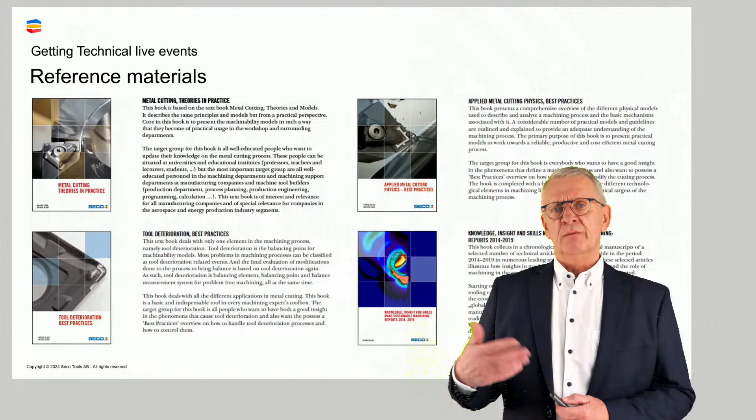Because model-based machining, there is a bit of a challenge here. Model-based machining means that we want to approach a machining process from a model which is a description of reality, that describes reality in such a way that we can understand it, that we can control it, that we can influence it. That's the target here.

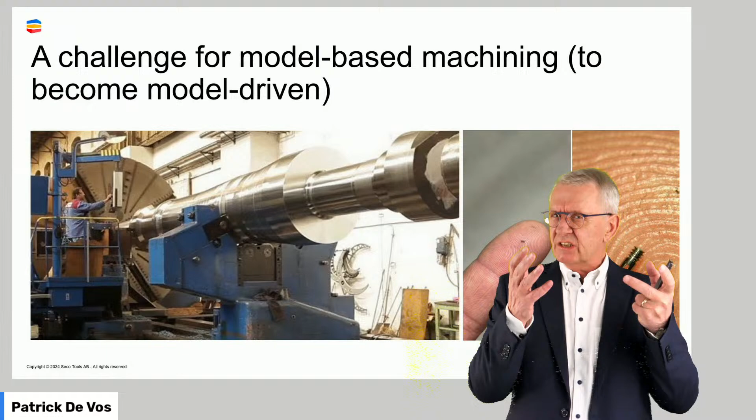And model-based machining, the challenge is: can we describe a model that could handle both these situations, and everything in between of course? That's the big challenge.

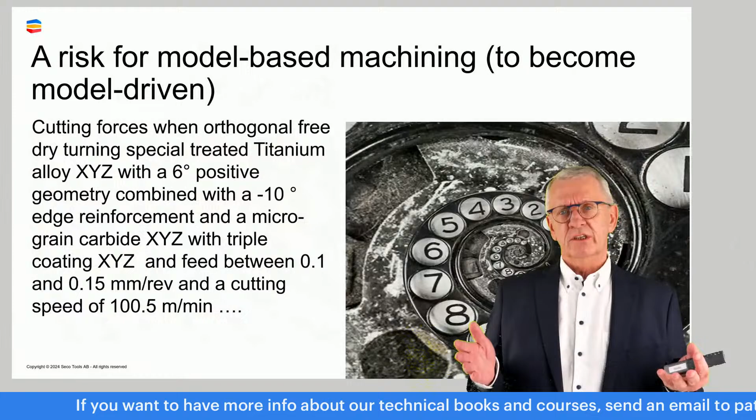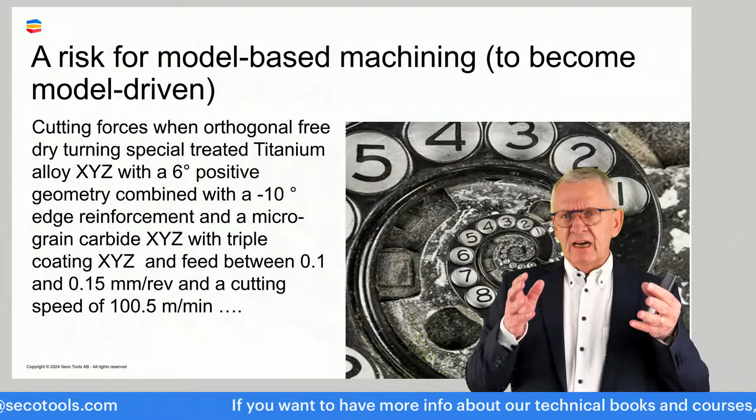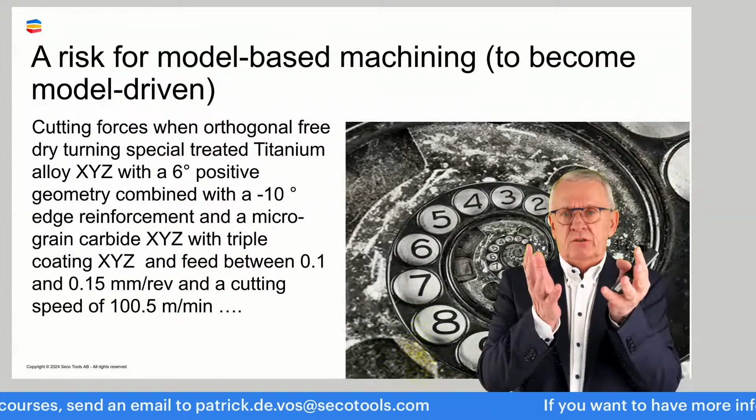And the risk today, because if you go out on the internet and try to find information on machining, what you find, and I think that's a risk, is that people dive further and further into a machining process. I just give an example here: what are the cutting forces with orthogonal free dry turning with specially treated titanium alloy, with a specific tool and specific cutting conditions? They do a lot of testing, and they come up with a certain thing. Then the question is, this description of reality, is this usable outside of the original setting?

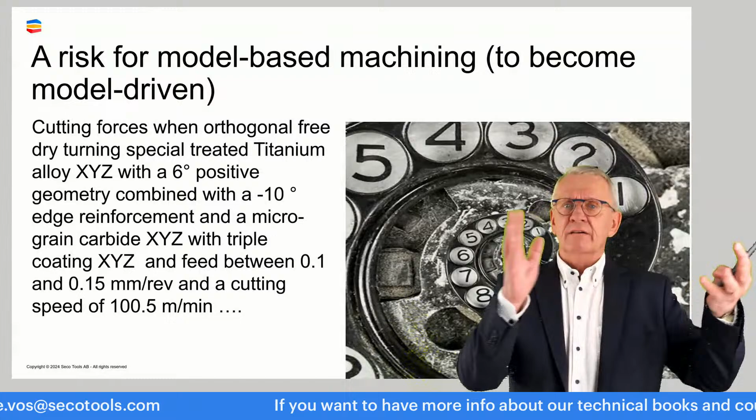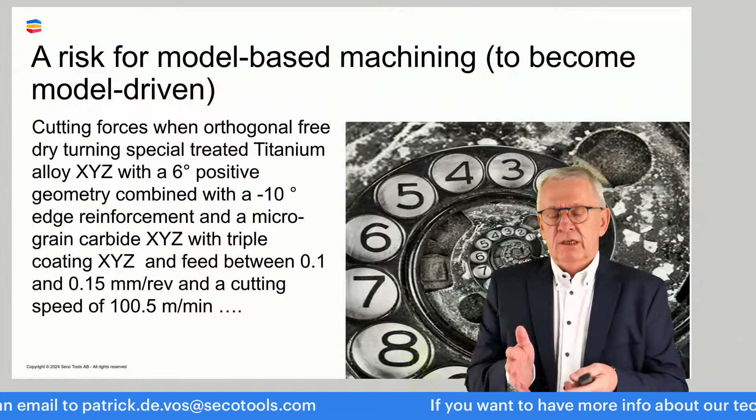That is a bit of the challenge: finding a model that describes whatever reality, and if it's possible, that's another question, but that's the challenge. The risk in trying to find that model is that we lose ourselves into details. And that's what we have to be careful with.

Now, what I want to do, and as I said, it's only 45 minutes, but I want to, because personally I find this very exciting: machining physics, applied physics, understanding the process. Because if you understand the process, and then suddenly you have a situation and you think, and you come up with what you think should work, do this, do that, and so on, and it works—I think that's exciting.

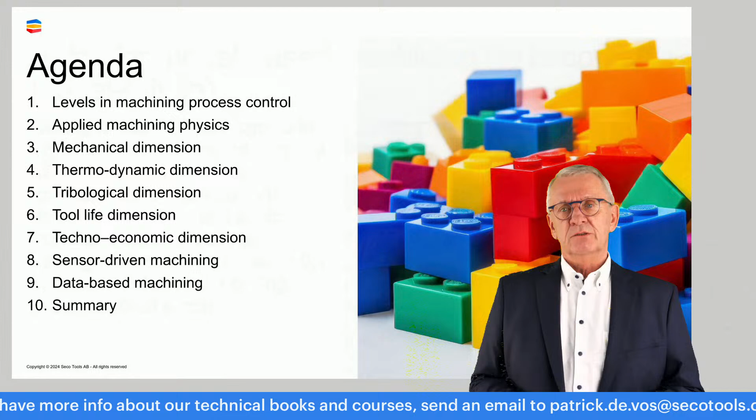And what I can try to do here is bring over that same excitement to you, that you want to learn more about these things. All the details we cannot handle, not in 45 minutes. Let that be clear from the start.

Now, if we talk about model-based machining, what is model-based machining? What's the big picture? How do we have to see things? Now, if you look to a machining process, we want to control it, we want to manage it, we want to make sure that it delivers what it's supposed to deliver, and that we have things under control.

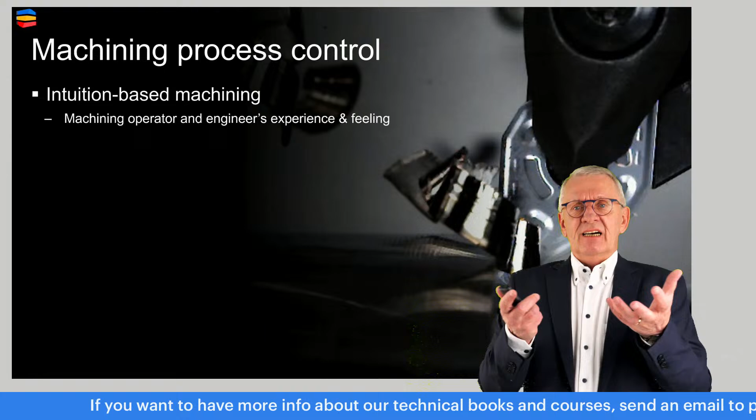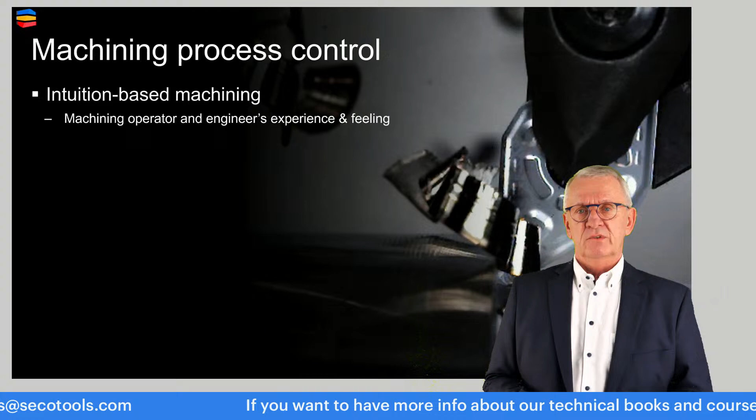Now, from a historical perspective, nearly since ever I could say, the traditional approach is intuition-based machining. Intuition-based machining is a situation where we have an operator, and the guy has experience, expertise, and he takes decisions based on intuition, on Fingerspitzengefühl, as we say in German. And that is intuition-based machining.

One level higher, the subject of today, is that we try to transform that intuition into more objective models, that we try to go away from the subjective approach—I think, I feel—and we go more into an objective approach. It's not about feeling, it's about knowing. And that is what we call model-based machining.

And if we continue this journey, because model-based machining, kind of since we started to use numerical controlled machines, that model-based machining appeared more and more into the picture also.

But if you look at the situation today, we see that people are moving towards sensor-driven machining. Sensor-driven machining is that I measure things, if possible, in process. During the actual process, I measure the situation, and we'll describe in a couple of minutes what I mean with the situation, but we measure.

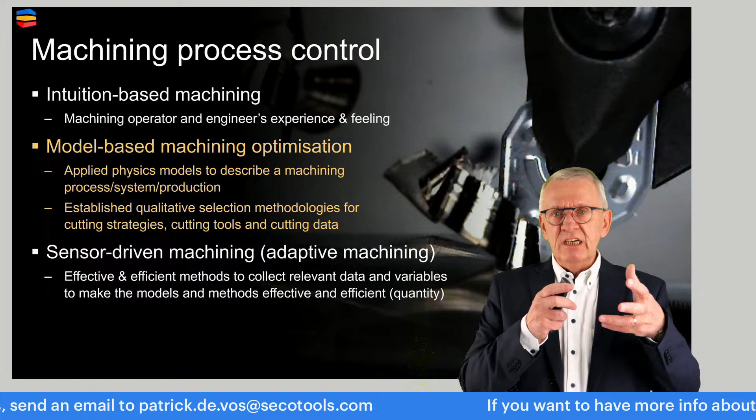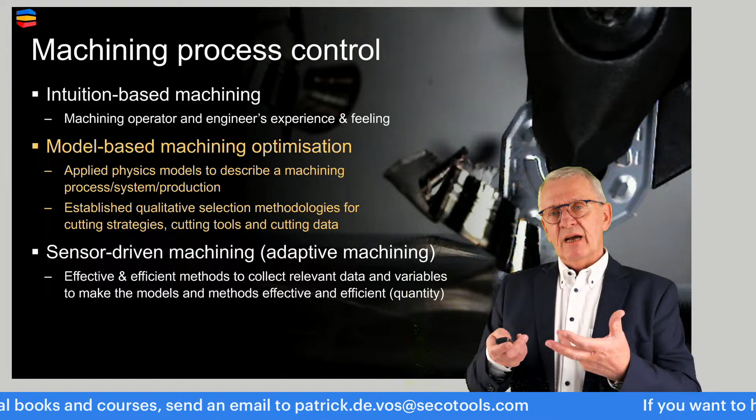We compare what we measure with the model which we described previously. We see if there are deviations, yes or no, and if deviations are there and we think the deviations are unacceptable, we modify. Some people call sensor-driven machining also adaptive machining, in the sense of: I measure, and based on the results of my measurements, I modify my machining process.

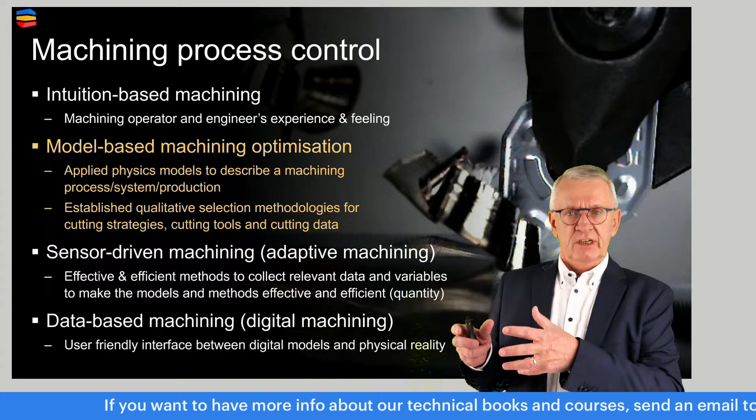Ultimately, it ends into, and I think this is really the future, but I also think the future already started today, data-based machining. People call it digital machining. I have a model, I have a lot of measurements from my sensor-driven situations, I bring the two together and I create a digital twin of a process, and I use that as a starting point to control the actual physical machining process. That's digital machining in its simplest form defined, data-based machining.

Now, intuition-based machining, as I said, that's the origin. It all started there. We were doing machining, and machining is a process we've done now for around 150 years, in modern times at least. People didn't really understand from a physical perspective what was going on, it was trial and error, and people got a feeling of what is possible and not possible. That's very typical for intuition-based machining.

All decisions about how to do it, which tool to use, cutting conditions, improving a situation, are based on experience, on the expertise of operators. Typical here are trial and error situations. I'm pretty sure you all know it: if you have a new tool and you want to figure out if it will work in a situation, what do you do? You take a test tool and do trial and error. Is it working? Is it not working? What do I modify to make it work? And so on. That's intuition-based machining, historical, where we come from.

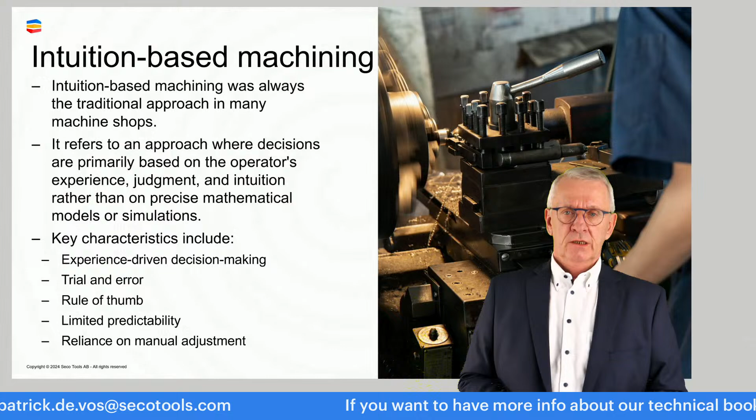Today, we try to work more and more, and as I already said, this came a bit with numerically controlled machines, where we said these machines, it's a bit unacceptable because they're rather expensive machines if you look at the hourly rate. We cannot stand there and try, and suppose, and think, and hope, that type of thing.

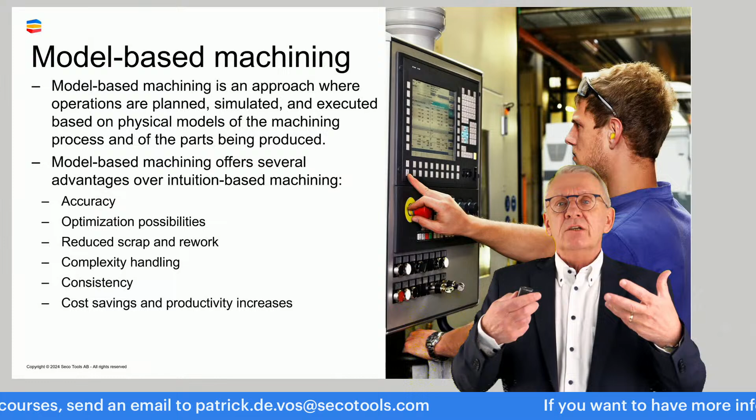We need models. We need models to describe. And this became even more important in the last 10, 15 years, as we saw that the batches of workpieces we had to produce became smaller and smaller and smaller. There was no time anymore for the traditional operator to figure things out. We needed to know as fast as possible what to do, and be rather sure it works.

Now, model-based machining. Machining is a physical process, so if we have a model, the model should describe the physics of machining. The model should, and I give it a title, Applied Machining Physics, use physical principles, we apply physical principles and try to describe a machining process.

Now, a machining process, most of you know it by heart I suppose, is a process where I have a cutting tool, and I bring the cutting tool in contact with workpiece material, with a set of cutting data, cutting speeds and feeds and that type of thing. I move the tool into the workpiece, I deform the workpiece material, I deform it until it shears off under the form of a chip. That is the description. There is even a DIN and an ISO norm that describes this. This is machining in its purest form.

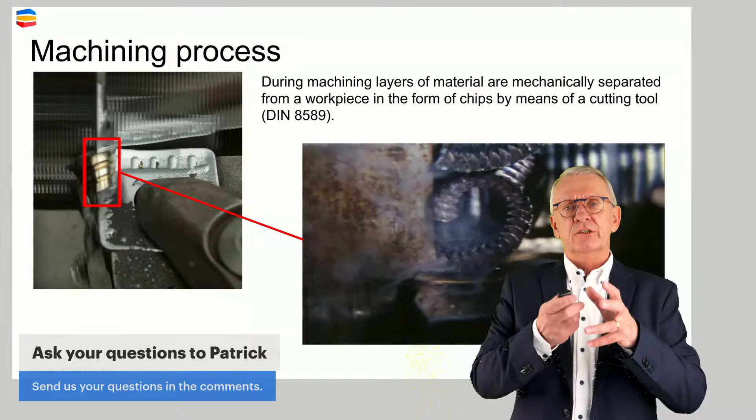Now, how the movement of workpiece and tool are relative to each other, that's the typical type of applications we have: turning, milling, and drilling. But all of them have in common that there is a cutting edge in contact with workpiece material, deforming it, shearing it off under the form of a chip, and as such transforming a rough workpiece into a finished, or semi-finished, workpiece. Now if you look at this process, and on previous occasions we've been talking about this, so here it's just repeating, if you look at a machining process, it's obvious that there are different types of phenomena.

I'm going to deform a material. To deform a material, I need to push against the material, so there is a mechanical aspect in this whole thing.

Chips are being formed, and those chips need to be taken care of. So that's another mechanical dimension. As I'm deforming material, heat is generated, and that heat has consequences, increased temperatures. That's the thermal effect around the machining process.

I'm going to create a certain surface - that's the quality aspect. I have a chip which is in contact with a tool, and there is a gliding process under pressure and so on, so there's going to be some tribological phenomena taking place. There is quite a multitude of dimensions we need to take into consideration if we want to describe a machining process.

And if we think now on describing a machining process, what exactly do we want to describe? Well, we want, in the end, a result which is a correctly finished workpiece at a certain cost, produced within a certain time. That's the wanted result.

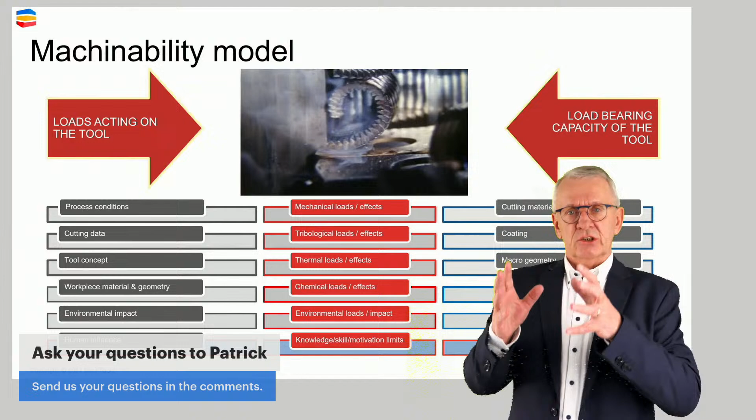And to achieve that result, we need to have a process where all the elements are in balance. I have a machine tool, I have a tool, I have a workpiece, I have fixturing equipment. All of that needs to be brought together in a balanced form so that everything is under control. And in the end, the result of the operation is a correctly finished workpiece, quality, at a certain cost, within a certain time.

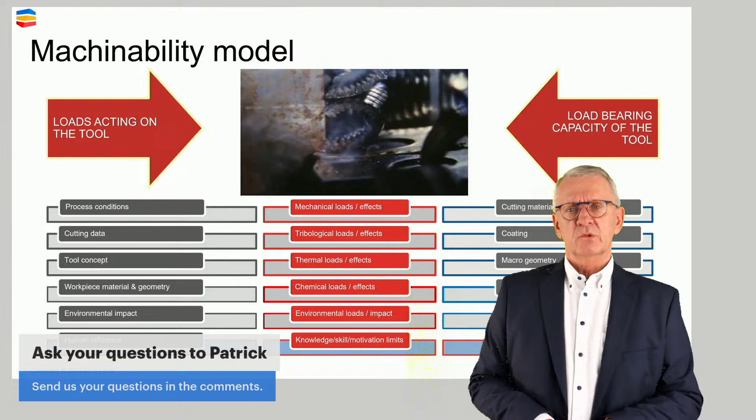And that is the model how we work with machining. Some people call it a machinability model, but that's perhaps a bit discussion with words. It's a model where I say, okay, I have a process and I have a cutting tool. I have a workpiece and a cutting tool. I bring the two together and there needs to be balance.

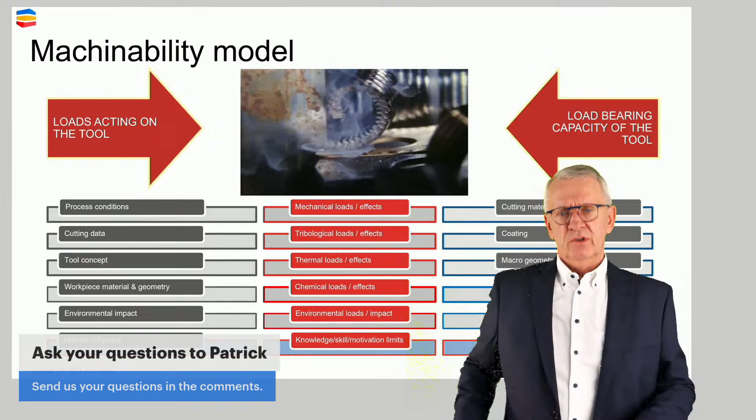Balance in all respects, and that's what I try to show here with the middle thing. There must be mechanical balance, thermal balance, tribological balance. Everything, all these phenomena need to be well balanced.

And there are variables influencing those phenomena. Some of the variables come from the process, here in this picture from the left, and those are going to put a load on the cutting tool - a mechanical load, a thermal load, whatever. And the cutting tool, the right side here in the picture, has a certain ability to carry that load.

And that's the balance I need. The carry capacity of the tool and the loads acting on the tool need to be in balance. Because if the loads acting on the tool are bigger than the load bearing capacity of a tool, I have unbalance, I have technical unbalance.

The result will be a badly functioning tool. The result will be a broken tool. And if you have a broken tool, you have a destroyed workpiece, or in quality, or in costs, or in time. So there's unbalance.

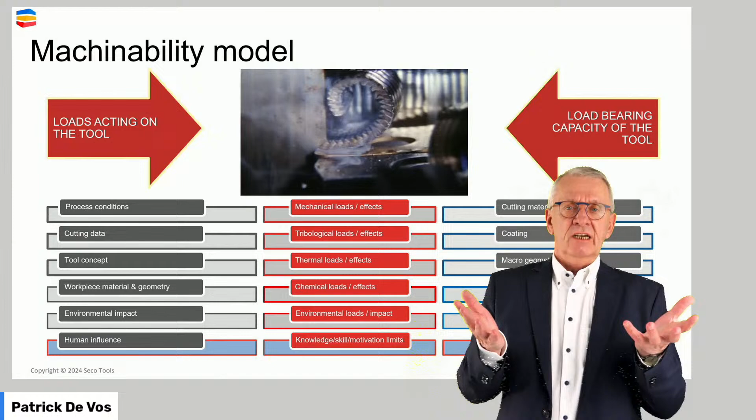There can also be a different kind of unbalance, because some people think, wait a second, I'm going to do the smart thing. I take a tool with a very big load-bearing capacity, so I'm safe. And it's a fine approach. However, we have to realize that mostly a tool like that is, from a purchasing cost perspective, more expensive.

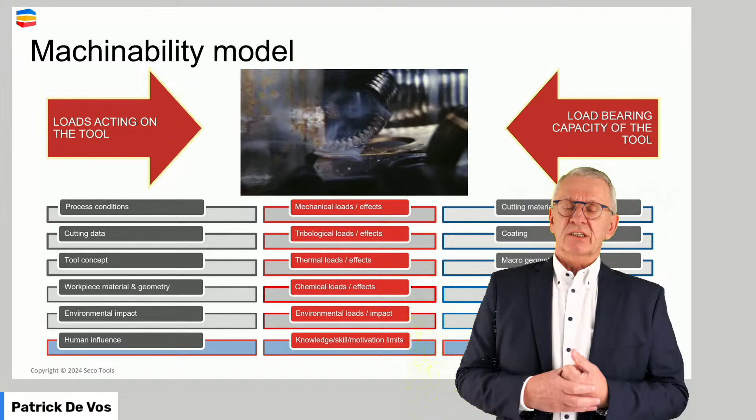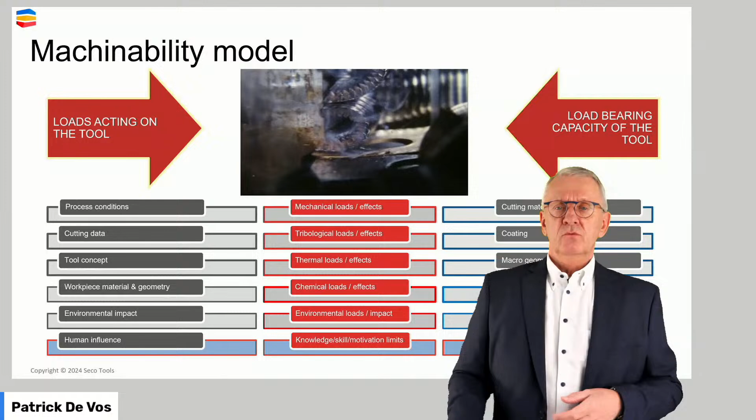And then the question can be asked if we don't have an economical unbalance, that we are using a tool which is too good, between brackets expensive, for the operation we want to have. So it's all about this model.

And the situation is today still, if I work with this model, if I try to figure out which tool to use, cutting conditions, machining strategy, to have a balanced situation, and people ask after a while, okay, did I do a good job? Did I manage to create a well-balanced situation? We kind of fall back on intuition-based thinking.

We ask the operator. How was it? How was the operation? How were the chips? Didn't you have vibration? That type of stuff. Or a little bit more objective, because asking the operator is a subjective approach.

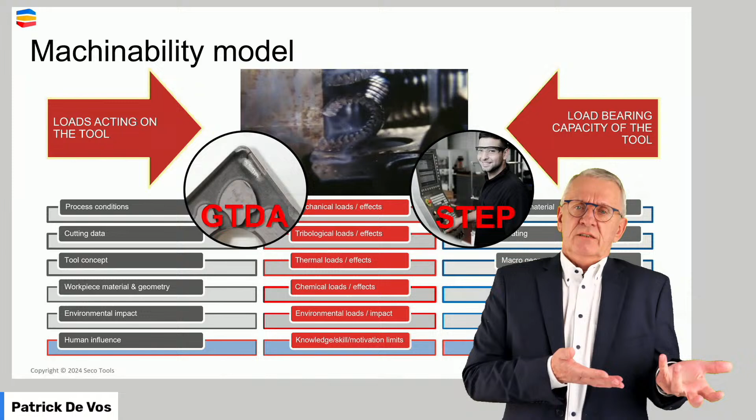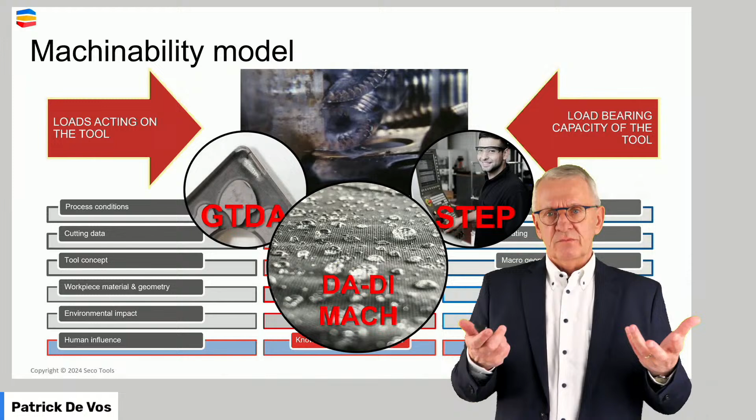A little bit more objective is looking at the used cutting tools, because if you know what to look for, a used cutting tool, a used cutting edge, once shows things. So the evaluation of did I do a good job working with this model is objective, subjective - ask the operator, look at used cutting tools - where hopefully a future, not so far away, will be that I can do data driven machining, that I have in-process measuring of things to see if things are indeed well balanced.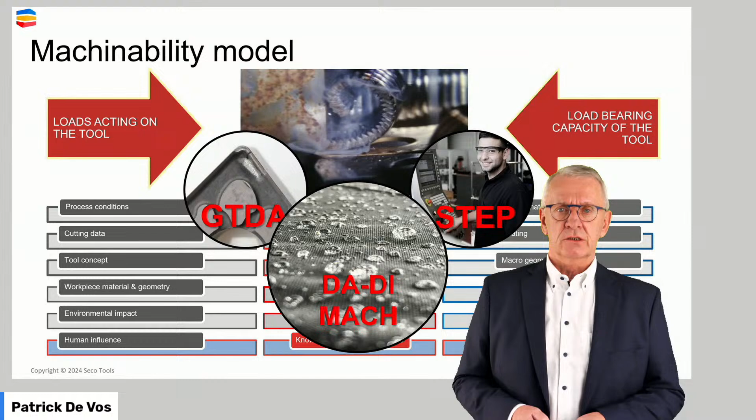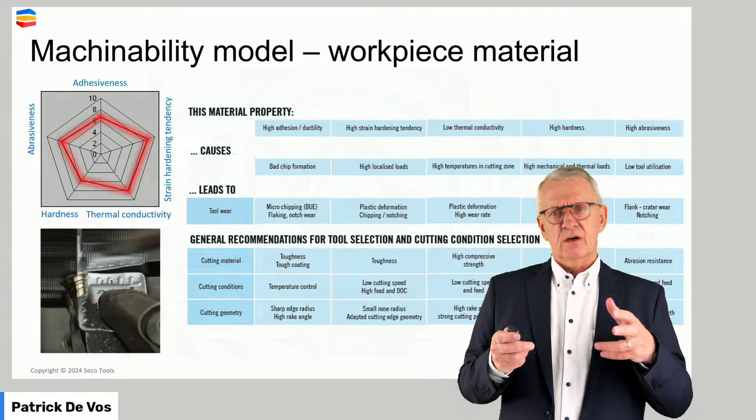Workpiece materials play a very important role in this. Quite a lot of work has been done to find out what are the real properties of a workpiece material, or the properties from a workpiece material that have an impact on how a cutting process goes on.

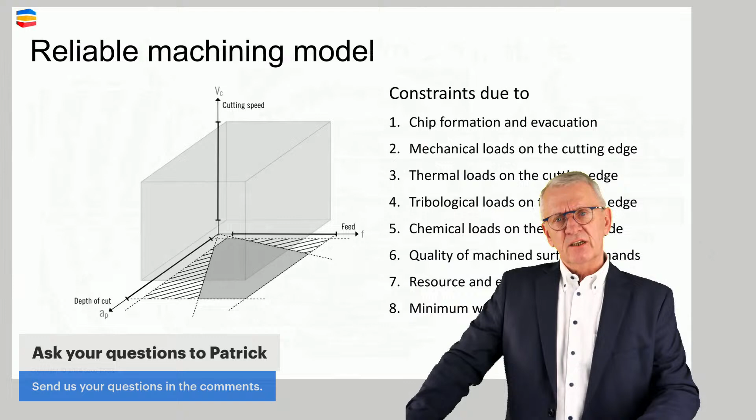And if you have your machining model and you understand what it is, and if you have your insight in your workpiece material properties, you can bring the two together and you can start thinking: okay, I want to have mechanical balance, I want to have tribological balance, I want to have thermal balance, which means that I don't want to overload the tool.

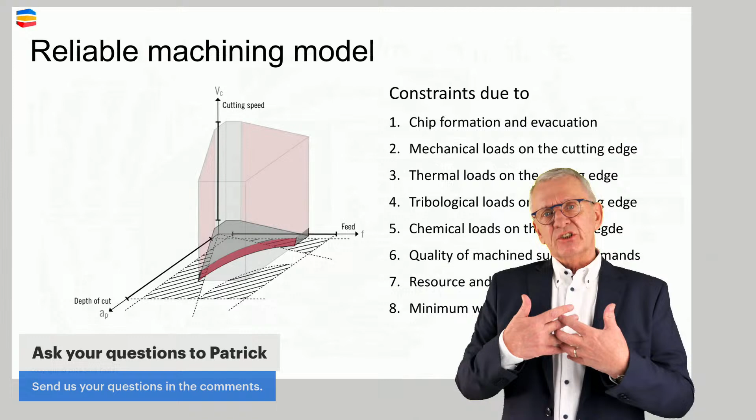And that can be translated into constraints. And constraints sounds negative, but it's not negative. It's just a line, a border that you should respect, not to overload the cutting tool, to have a safe operation, a reliable operation. And if you think on it, reliability is key, because I want a correctly finished workpiece at a certain cost in a certain time.

To make it happen, that total picture, I need to have a reliable process. And that is one other way to define a machinability model. It is a model that helps me to find out where the constraints are. And once again, constraints is not negative. Constraints is, I don't know another word, borderline or whatever, that you have to respect during machining. And if you stay within the constraints, the process will work fine.

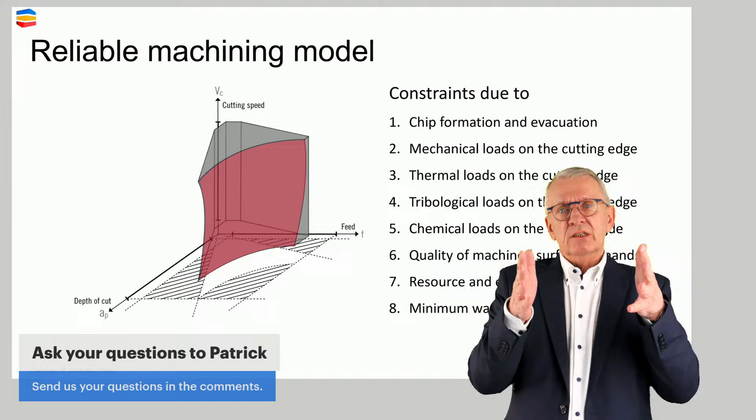And we have what we want in a very objective way. And it's not about I think, I hope, I suppose, but it's about I know. And that is the whole target of the exercise.

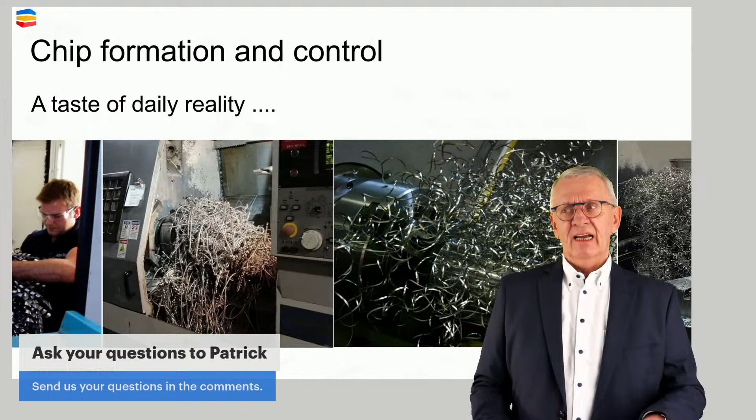Now, in this creation of a model, in this creation of a domain in which you can work and have a reliable process, there are mechanical things to consider. One of the things to consider is chip formation. And chip formation is perhaps, that's still a frontier in my eyes, because if you look at chips in reality, in a workshop, every single chip is different. And I think that's really a challenge. I still think we don't fully understand how a chip is formed.

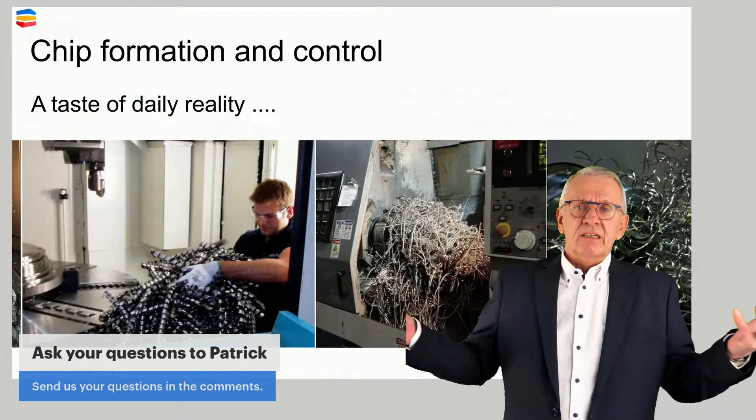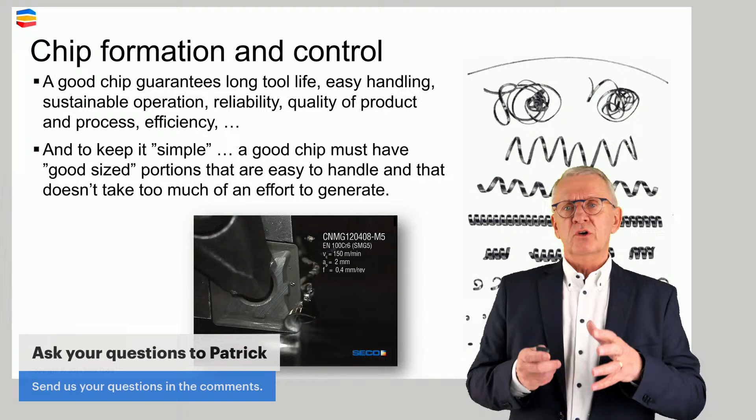Otherwise, we should be capable, much more than in the present situation, to control our chips and to avoid problems, as you see behind me, that are daily life in a workshop. Chip formation is about having chips of a good form, of a correct form, so they don't disturb the process. They allow the cutting tool to work. They are not putting in danger the quality of the workpiece, the safety of the operator. That is the definition of a good chip.

And good chips heavily depend on the workpiece material. I think you all know that. Workpiece materials, some of them give short chips, whatever. Others give long chips, whatever. And it's also depending a lot on which tool you use. Especially the geometry of the tool plays a very important role, and cutting conditions. And that's the battle here: better understanding than we do today, so we can bring more uniformity into the type of chips we form. We can take out a bit of the chaos factor from chip formation.

Mechanical is also cutting forces. I think a lot of you are rather familiar with what we refer to as the Kienzle modeling. There are quite a lot of models we use to describe cutting forces, the forces that we have to put on a tool so the tool can move through workpiece material, deform it, shear it off.

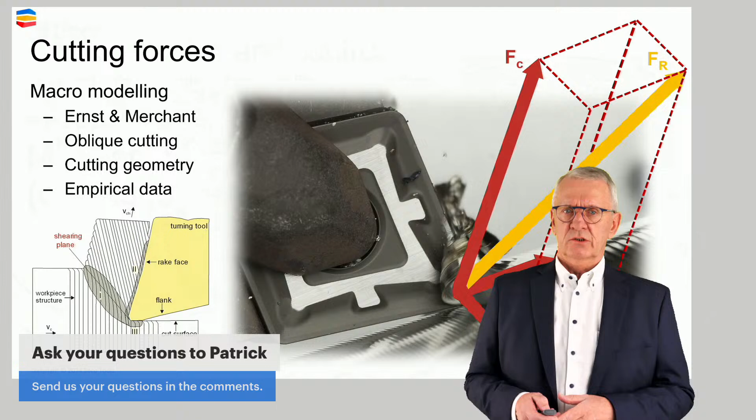Kienzle, still today, it's 50 years old, or it's 70 years old, but it still gives rather good results. So it's a rather good thing, and we need this because the cutting forces, some of the practical issues we have during machining, problems with quality, with vibrations, with broken tools, and so on, can be brought back to there being unbalance in cutting forces. We need to do something.

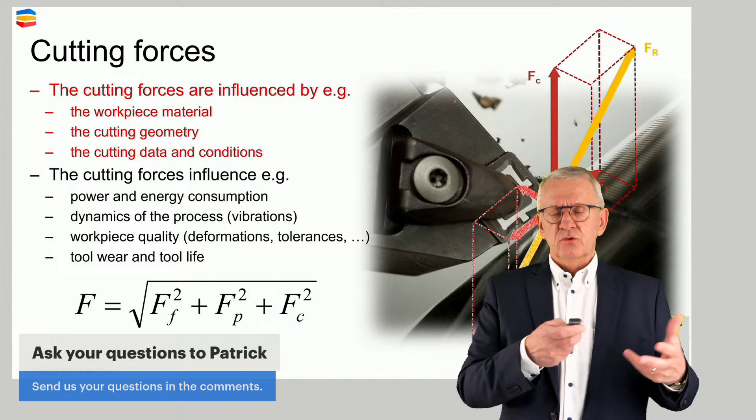And what the Kienzle approach then describes is the variables we have to work with to change cutting forces, to influence their size, to influence the direction in which they work. And there is even, and I don't want to frighten you away with this formula, because the reality of today is that we don't work with these things anymore. We have much better aids at our disposal for this.

But I want to show you the formula, because in this formula the first symbol there, psi v, that's what is referred to as the variation factor. And the rest of this formula, and a formula is just a symbolic writing of an insight, the rest of this thing we fully understand.

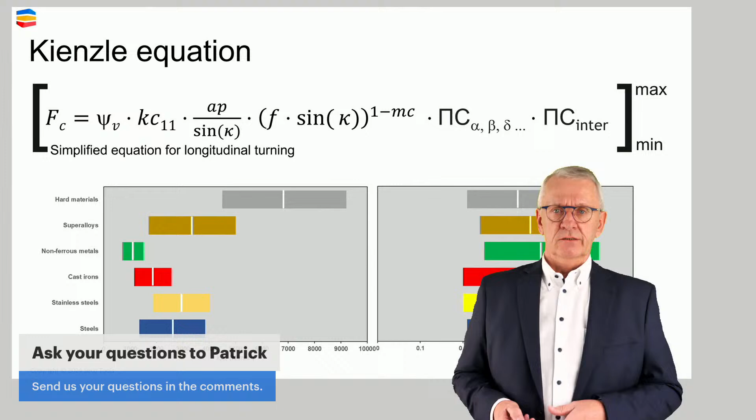We understand the relation between cutting conditions and forces, and between geometry and so on. But if we measure, we still see differences. So far, scientists put these differences into one single factor, psi v, the variation factor. Quite a lot of research today is done on that variation factor. If a model predicts something and we see in reality that there are differences, the big question is: in that variation factor, what is the variable creating the difference? That is what people work quite a lot with.

You remember perhaps one of the Getting Technical live events, we talked a little bit about this: there is not one single cutting force, but a variation of cutting forces, because of chip segmentation that causes cutting forces to go up and down. That's a very typical example of something which falls into that variation element in the Kienzle model.

Thermodynamics. We deform material. If we deform materials, heat is generated, and that heat translates into higher temperatures in the tool, in the workpiece, in the chip, and there are consequences to that. If we try to model it, partly we deform material and partly there is friction between the chip and the rake face, and between the workpiece and the clearance face. Mainly the shear zone is generating a lot of heat; to a lesser extent, it's also the friction.

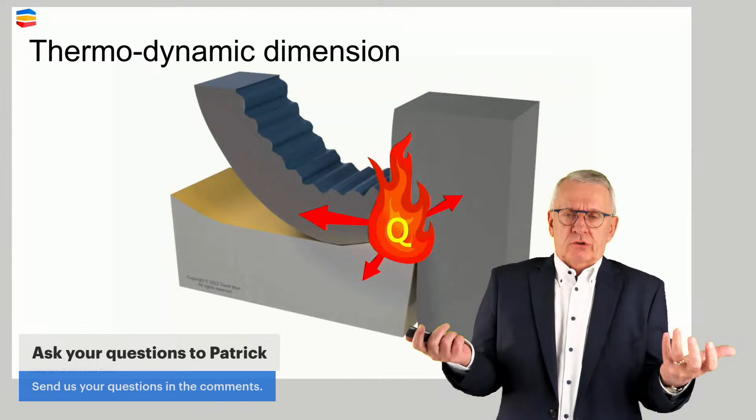Heat is being produced, and heat has a natural tendency to spread out. Part of the heat goes to the workpiece, part goes to the chip, part goes into the cutting tool. Heat that goes to the chip is very good for us, because it means the heat leaves the process without doing any harm. Heat that goes into the workpiece can modify the workpiece properties, deform it, cause expansion, change the structure, so we have to be careful with that part.

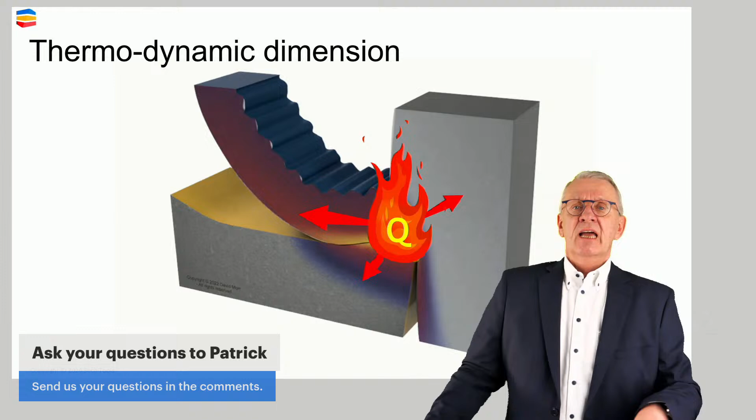Heat that goes into the cutting tool has consequences. Everybody talks about the cutting temperature, but there is no single cutting temperature — there is a cutting temperature gradient. There are different temperatures depending on where and when you look: after 1 second of cutting, after 5 seconds, after 5 minutes, or after 50 minutes. Each time you'll see a different picture of temperatures in the cutting tool, the workpiece and the chip, though the chip is of lesser concern for us.

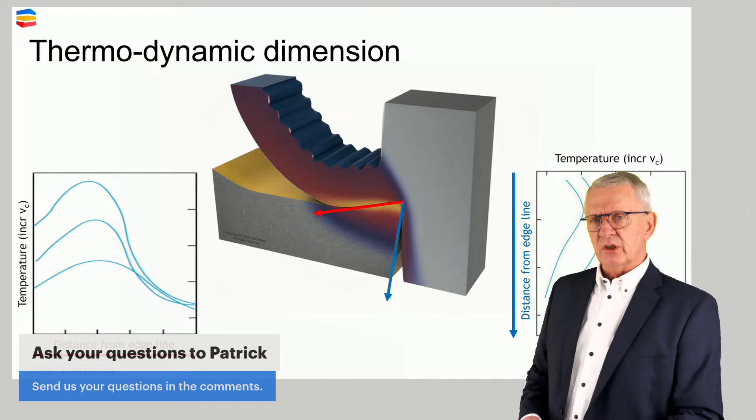It's intriguing, because if you look at the rake face, you see different types of temperatures, as shown in the diagram. At the cutting edge itself there is a certain temperature; as you move away from the edge, the temperature increases, and if you continue moving away, it reduces again. We see the same on the clearance face: not one temperature, but a gradient — at the cutting edge, then increasing as you move away, then reducing further out. You see 3 lines here, for 3 different cutting speeds, so whatever the cutting speed, this pattern reproduces.

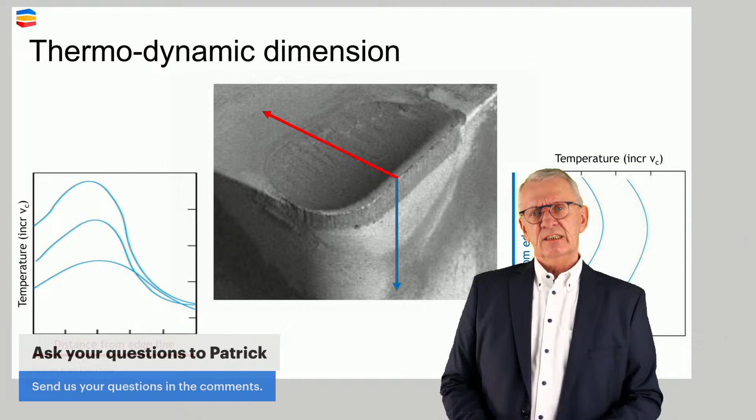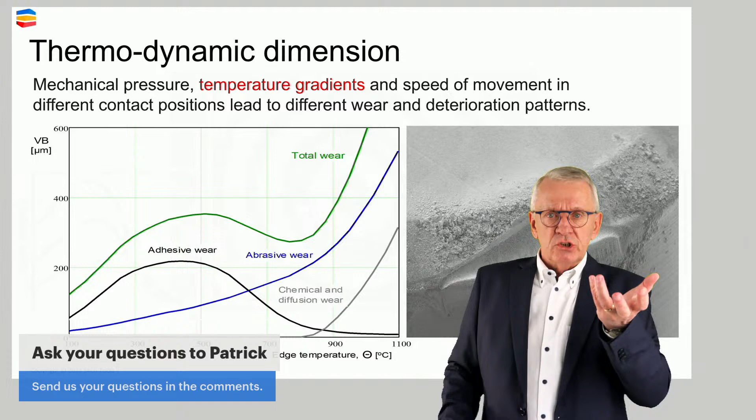Interesting is, if you look at a worn cutting edge, where the temperature is highest, you have the most wear after a given amount of time. So there is in machining a very clear relation between temperature and wear. Personally, I find this one of the most exciting pictures in machining: depending on a certain temperature — and remember we have different temperatures along a cutting edge, on a rake face and clearance face — which physical phenomena will be the main source for wear appearing on the surfaces. That brings me to the tribological dimension.

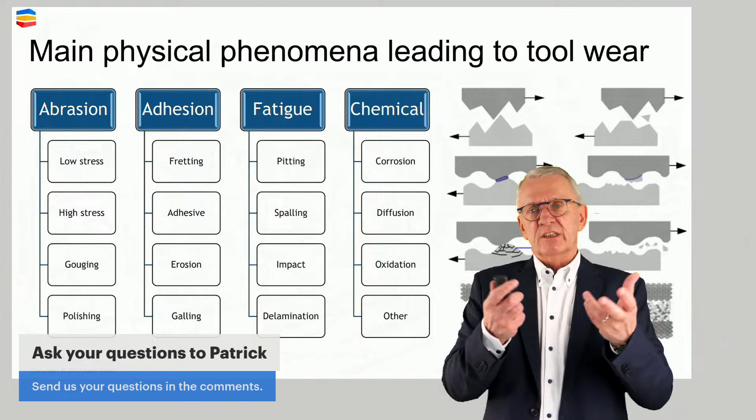There are mainly 4 physical phenomena leading to wear on a cutting edge: abrasion, the scratching effect; adhesion, the build-up edge thing, which I'm pretty sure you are familiar with; fatigue, the hammering effect on cutting edges; and chemical — we bring together different materials in rather high temperature zones with high pressures, so chemical reactions will also take place. So there are different phenomena.

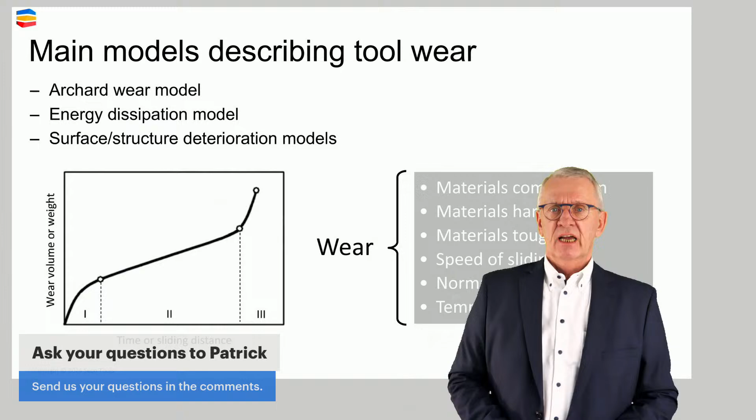How the wear develops, the pace of the wear development, is another variable. And if I bring the two together, which type of physical phenomena leads to wear and how fast does it lead to wear, I end up in what we call the tribological models in machining, describing how wear will develop on a cutting edge over time in a given situation. There are quite a lot of variables to take into account here.

If you look again to reality, and if you take, most probably you in your workshop, you also collect already used tools for reconditioning. But if you look in those bins with the used tools, and if you look at cutting edges, you see that roughly every cutting edge looks different.

So to apply this modeling, we need structured approaches. One structured approach is what we call global tool deterioration management. It's the subject for the next two sessions we are going to organize. Because if you control this, everybody, or a lot of people, think that wear in machining is a technical thing, and it is. But wear in machining, when well worked with, can also be a management tool, to influence what people refer to as operational excellence.

But I'm not going to talk too much here because time is flying already, I see. The next session and the session after, we are going to focus only on one single thing: global tool deterioration management. How to work with wear on tools in a way that it can become a management tool to take certain decisions to improve the operational excellence of a workshop.

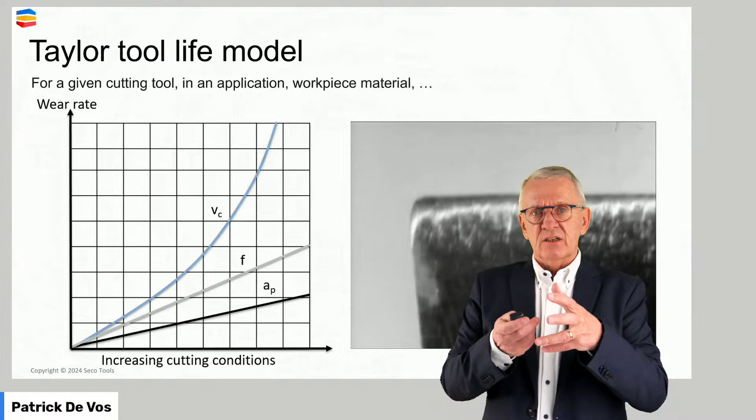Can I influence this? Can I control it? What are the variables? That is what we know today as Taylor's law, or Taylor's model, to describe tool life. Tool life is defined as the useful lifetime of a cutting tool, the time the tool can work and deliver on expectations. That's tool life. What Taylor noticed was that, mainly in a cutting situation of a tool and a workpiece, the cutting speed is a very important variable.

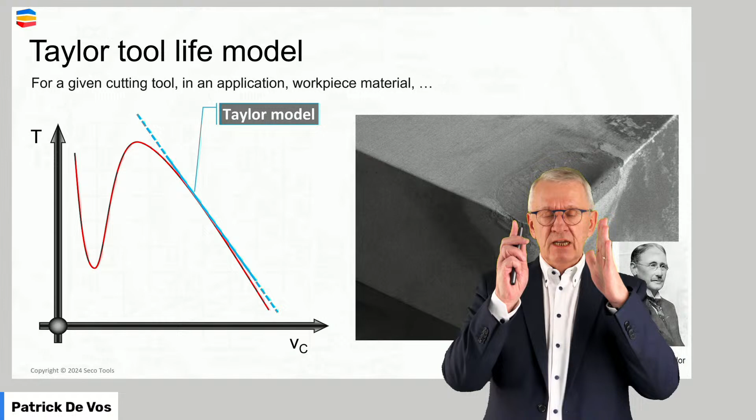So he focused quite a lot on cutting speeds, and he focused on a situation where he could control it. And that thing, you have to be aware, if you see the picture here, that Taylor's model works within a certain window. If you are out of the window, this model is not working anymore.

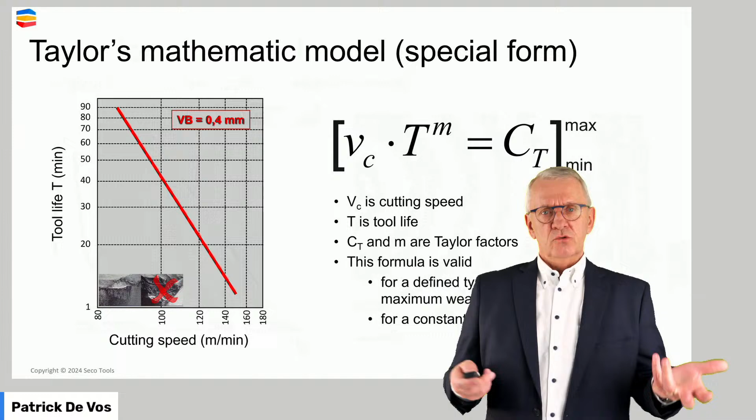We need other approaches. But this is, I think, if you call yourself a machinist and you don't know about the picture here, the formula is less important. Taylor says there is a relation between cutting speed and tool life for a certain type of wear.

Afterwards, people, of course, dove much deeper into this, and they figured out it's not only cutting speed, it's also the tool cutting material, the cutting geometry, the feed, and the depth of cut. So Taylor's original thing was extended to a much bigger thing. Again, here's the formula - I show the formula, not for the formula itself. We don't work with that anymore. We have much better things to work with today.

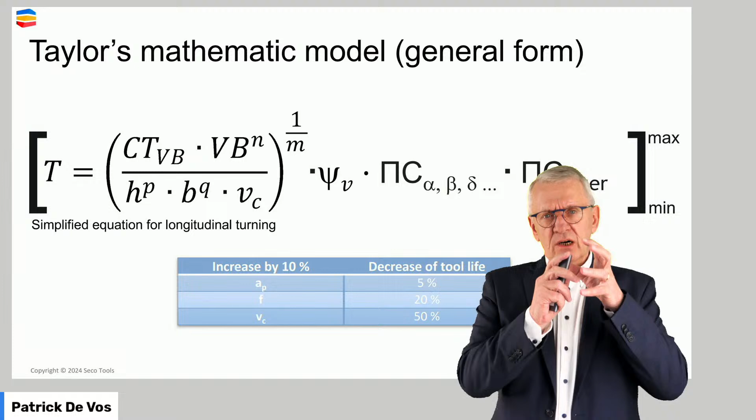But also here you see, after rather big discussions, the scientists said this Taylor thing, we can continue to work with it, but we have to add that variation factor. Here you see it in the middle, the psi v. Because we have a model, we work with it, we predict the tool life, we look to reality, we see reality is different. And then the question is: okay, what did we overlook? What variable is causing this? All of the potential ones are put into that one single psi factor, the variation factor, where quite a lot of research work nowadays is focused on how we can give it a value in certain situations.

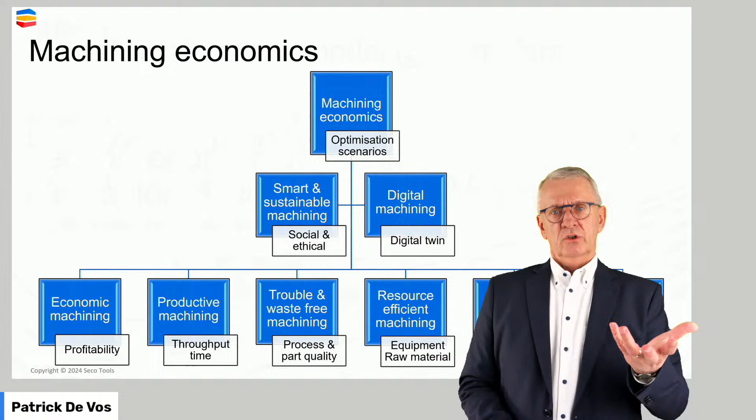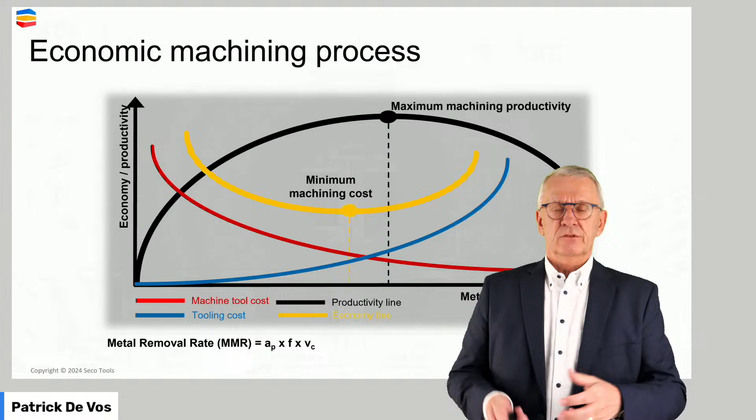You have also the techno-economical model. I added this just to be complete, because if you look at machining, next to the technical side, of course, there is an economical side. We do machining to produce workpieces with certain demands on quality and on costs. We want to work with minimum costs, so we have economical sustainability. We are competitive on the market with the products we produce.

What people have to realize, I call it the next step in economic machining, is that the costs in machining are not only related to the process, but are also related to the things around the process. If the result of your operation is a not correctly finished workpiece, you need to produce another one. That's an extra cost.

If your machine is standing still, not making any workpiece, for certain reasons, there is a cost related. These two extra costs, due to lack of quality and due to time efficiency, also need to be carried with the one workpiece you produce in the end. In other words, what I try to do here is link machining to process efficiency.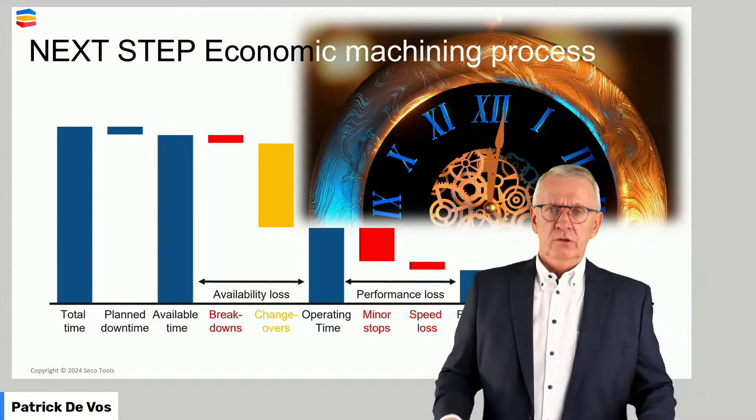Just to give you an example, you see here two situations in one. One situation is in the middle, a real situation, something I had myself a couple of years ago when I was working in a workshop. In the middle, you have a situation where 15% of the time the machine is actually producing workpieces. The other situation, around it, is where the machine is producing workpieces 50% of the time. Now, if we talk about optimizing, these are two very distinguished, different situations.

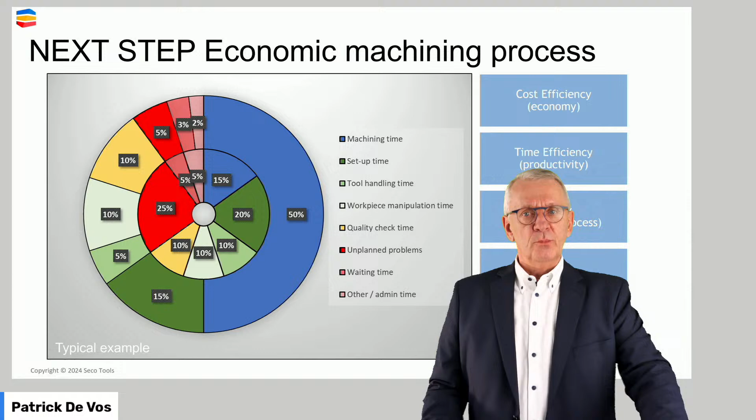Optimizing the total picture for the situation in the middle means first focusing on the things around the machining process, because they stand for 85% of the time. For the situation on the outside of the circle, machining stands for 50% of the time spending, so it's worthwhile spending time on optimizing the machining process because it's already a big part of the total time.

Model-based machining, very short. But as I said, we have the reference material.

A few words on sensor-driven machining. Because I think from a historical perspective, already Taylor, if you look to the book he published, where he described what we still call today the Taylor equation or the Taylor model, 1906, he already said...

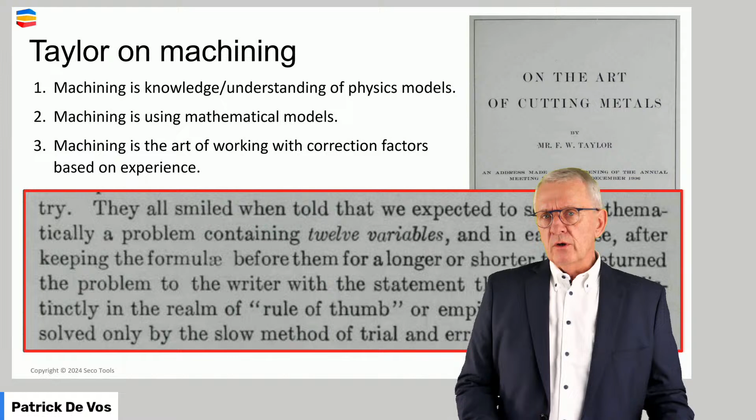I most probably suppose you can't read it, so I make it a bit bigger. Taylor said, okay, I have the mathematics, I have the formula, but if I take the formula, give it to mathematicians, they come back and say you have an impossible formula, there are much too many variables, we can't solve it. That's why for a long time, with intuition-based machining, we knew the model, but we had to count on the intuition of people to solve the equation.

Well today, and now I'm dreaming perhaps, but can you imagine that we have enough data collected over time that, in a more structured way, we could solve the Taylor equation? The moment we can do that, just an example, I simplify, but the moment we can do that, we have digital machining.

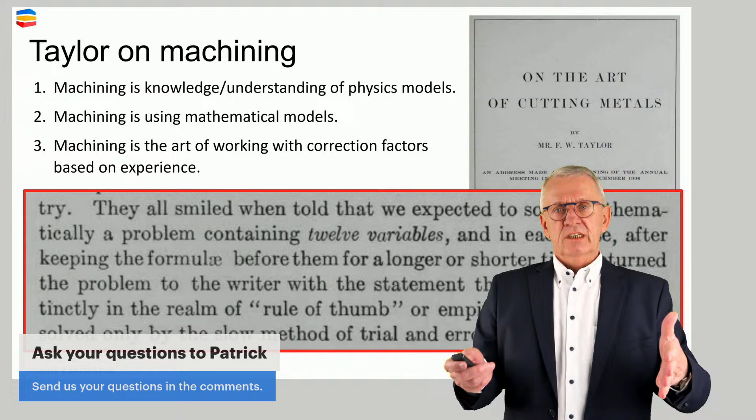Taylor already was, in that respect, kind of a visionary. More than 100 years ago, he said we need something. In those days, it was an experienced operator. Today, we have other possibilities. It's only a numerical method we need to find to solve the equation. It's data we need.

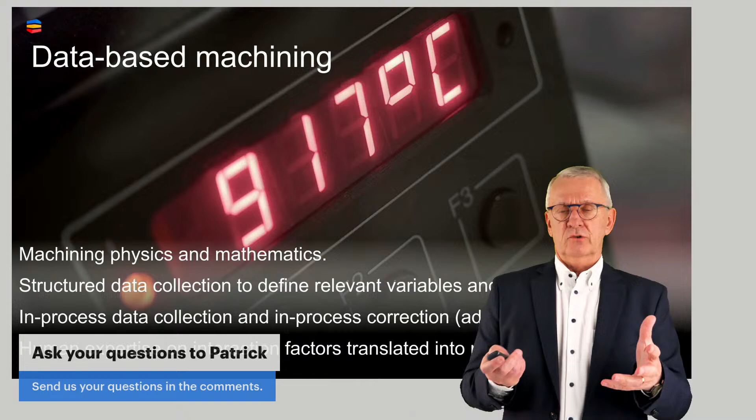Which brings me to data-based machining, digital machining. If I have the models, if I have enough data, so the data is representative, is relevant, is meaningful, then everything comes together, and then the picture is, or the circle is round, I should say.

Machining is a process where there are, from a physical perspective, quite a lot of things happening: mechanical, thermal, tribological, chemical, and so on. What we want with model-based machining is to describe this with a model, so we can use it to create a balanced machining operation, where we know, with a minimum of trial and error, effort, waste, and time loss, that the result will be what we want, a correctly finished workpiece.

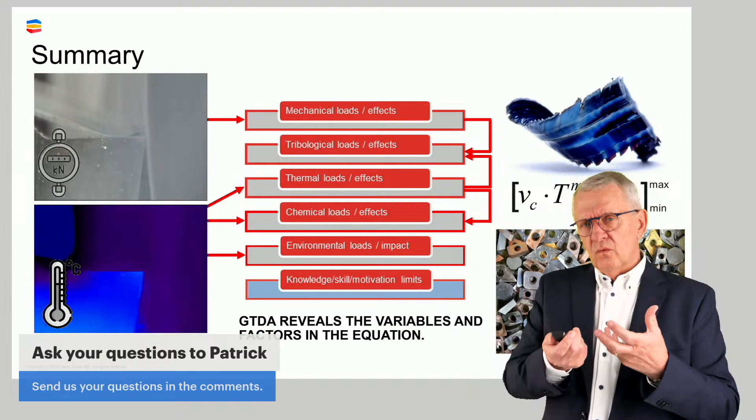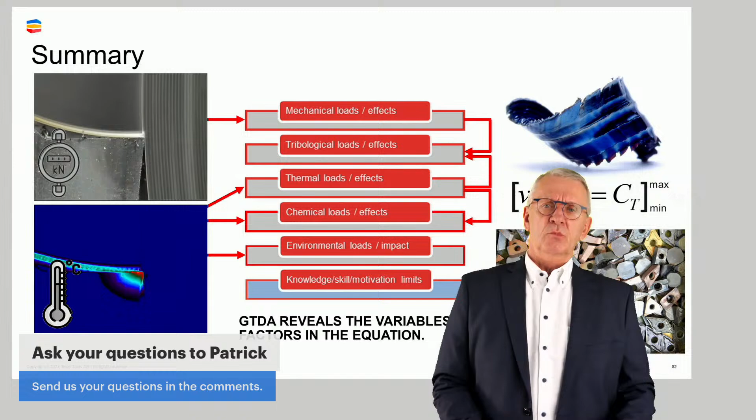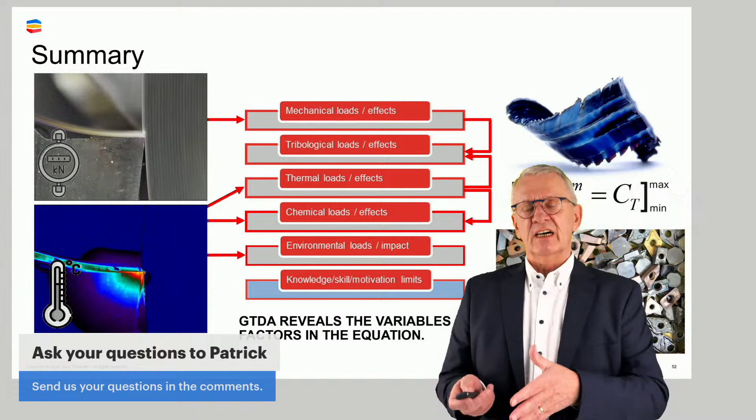Knowing how good we did our job working with this model, today we still refer back to talking to the operator. One step further it's more objective, we look to used cutting edges. How we could do that, what we could learn from that, that's for the next two sessions, which we are going to dive into.

I showed you two formulas, and twice I said don't worry about the formulas. In the modern world we don't work with these formulas anymore, it's too time consuming, but today we have apps, we have software, whatever that takes care of the mathematics. For me, important, and I think that's the new role of the modern machinist, it's not about calculating things, for that we have our iPhone or whatever.

It's about taking the results of the calculations and interpreting that. What does this mean? How do I work with that? Does it seem logical to me? And most important, of course, if it's put in practice, in reality, then observing and seeing if reality follows the model, and if not, correcting. I think that's the role of a modern machinist, not being a calculator, but being an observer and a corrector. Observe what is happening and, if needed, correct.

I'm a bit proud of myself, 45 minutes, and yeah, perhaps I'm too fast saying I'm proud of myself, because I should ask you first: is the picture, is the story, does it make sense? Despite we went so fast from point A to point B, please let me know.

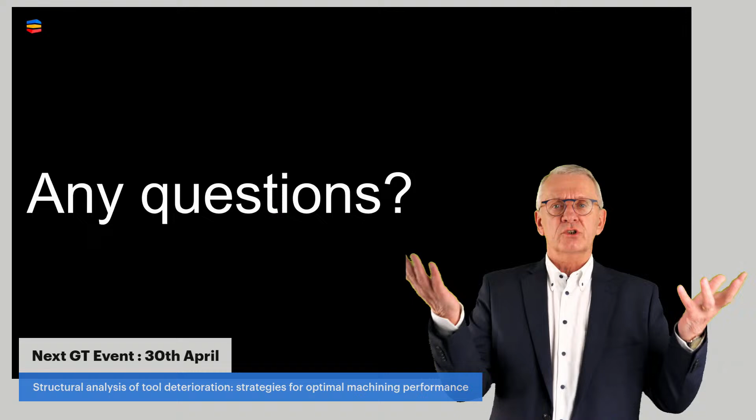If you did the same exercise with feed, increasing feeds and measuring cutting forces, you'd see that as feed increases, cutting force goes up, but not to the same extent. Especially when feeds get bigger and bigger, cutting forces still increase, but relatively speaking, not so much anymore. It's based on that phenomenon that today we have a machining process called high feed machining, where we purposely look for high feeds as the road to productivity, in situations where we have to be careful with cutting forces during the process due to instability or whatever.

Those are the two values, kc1.1, specific cutting force, and the exponent, which we call the Kienzle exponent, MC.

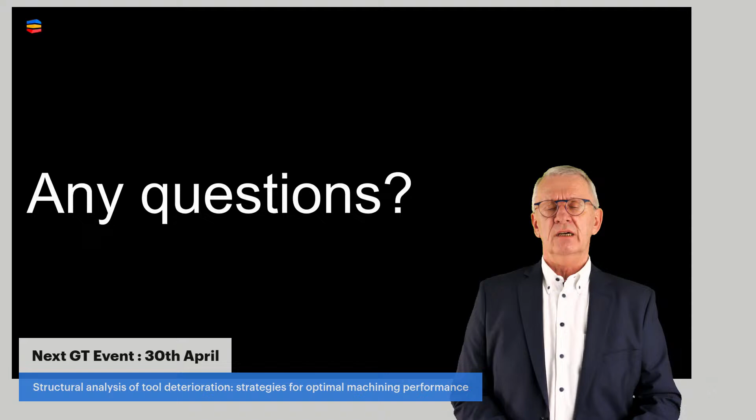I want to invite you to the next session, 30th of April, where we're going to dive into tool deterioration, not in the traditional way. Everybody talks about, if you have this type of wear you do this, and that type of wear you do that, that's the approach in mass production. I want to take the approach in small batch production, where, if we're clever, tool deterioration, next to the technical dimension, also has a management dimension. If we work well with it, we can use this to work with operational excellence principles.